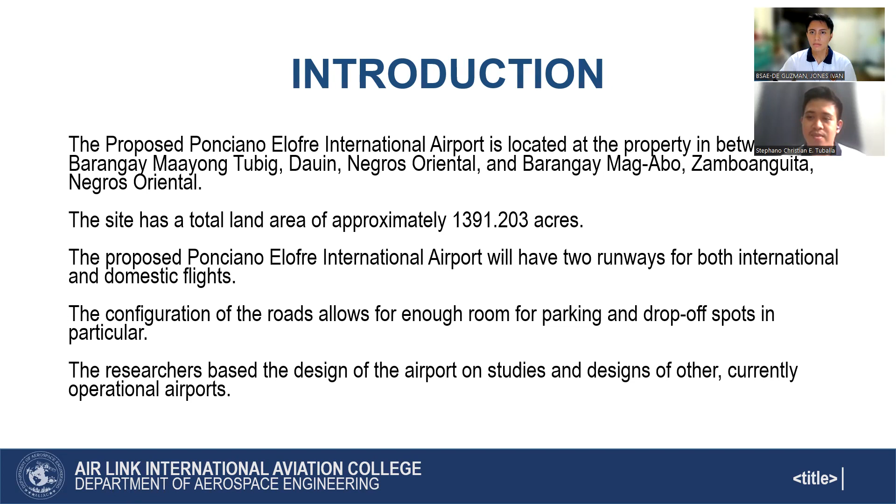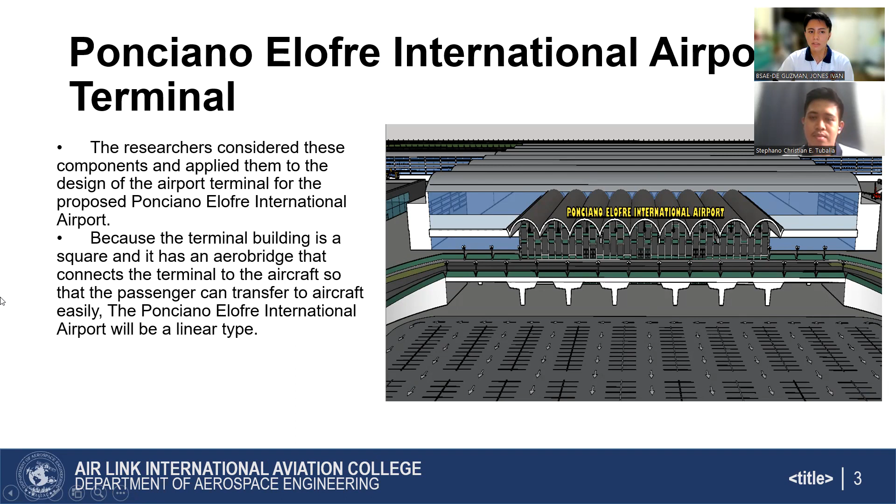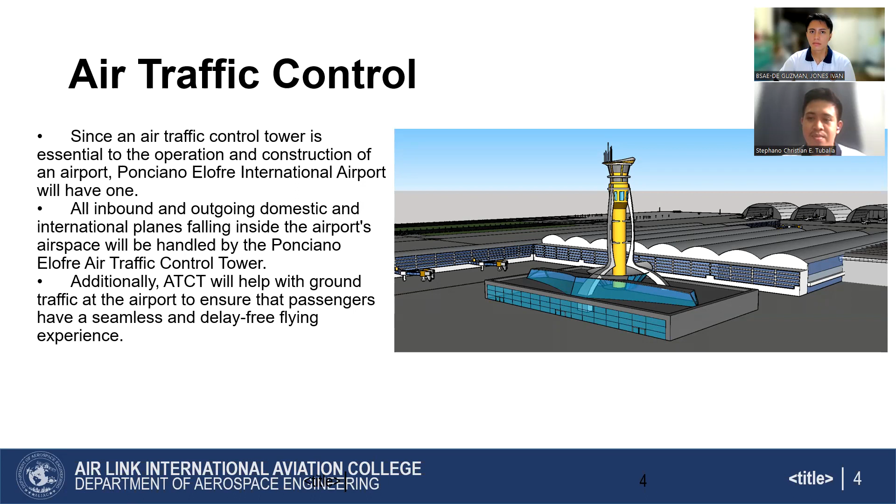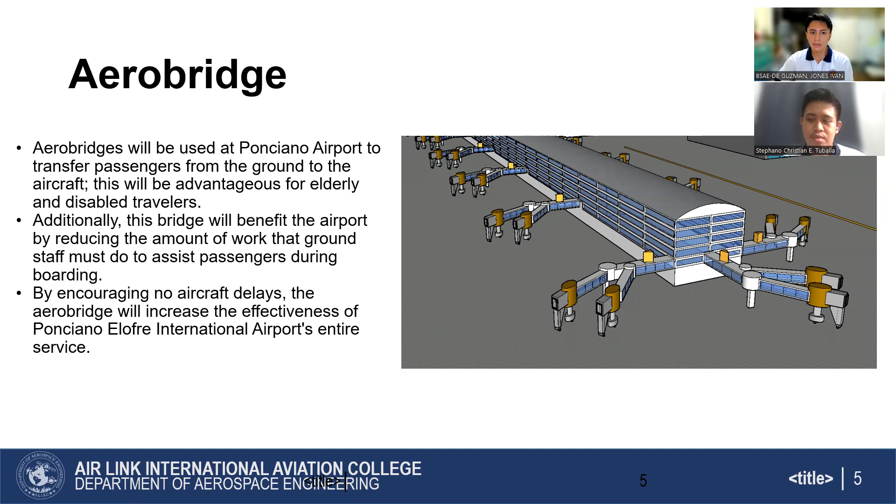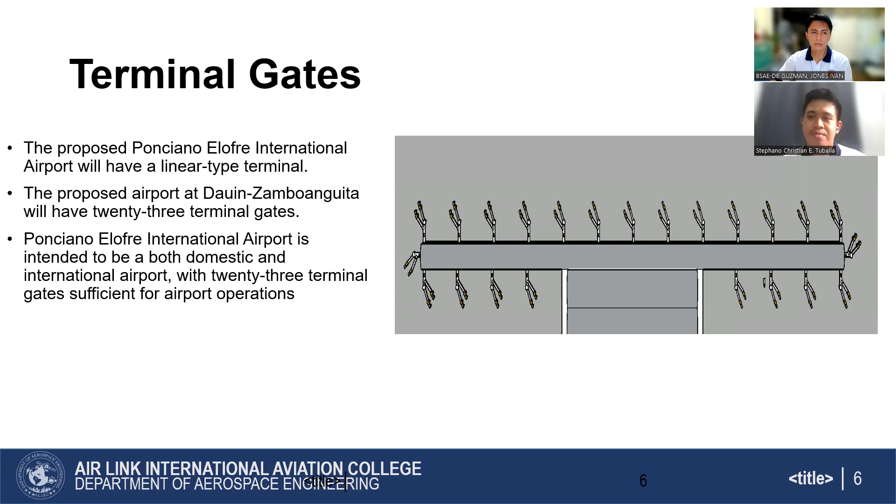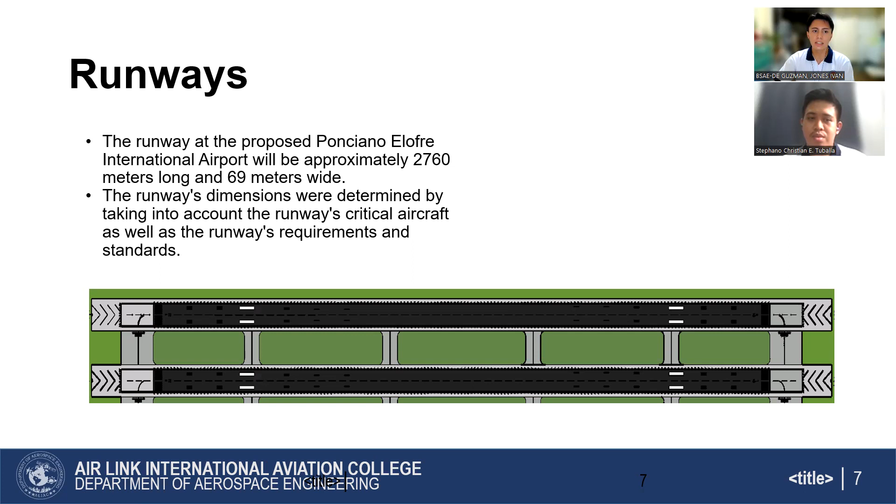Next, we have runways. The runway at the proposed airport will be approximately 2,760 meters long and 69 meters wide. The runway's dimensions were determined by taking into account the runway's critical aircraft as well as the runway's requirements and standards.

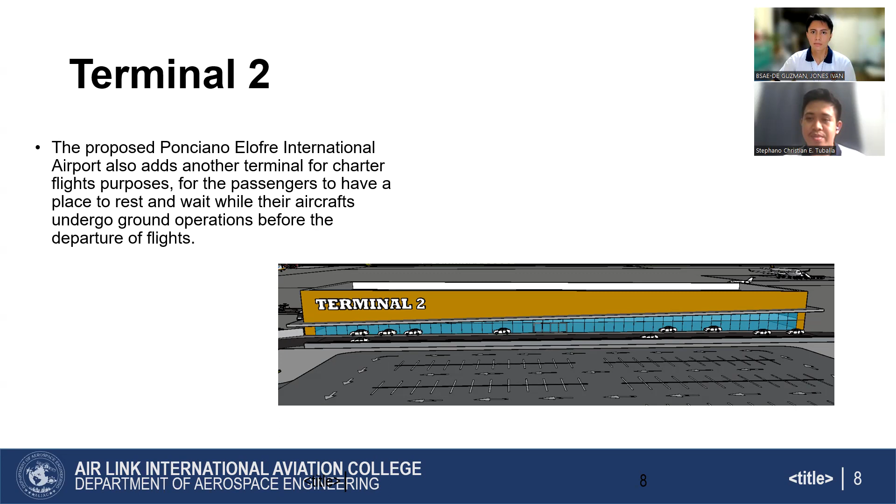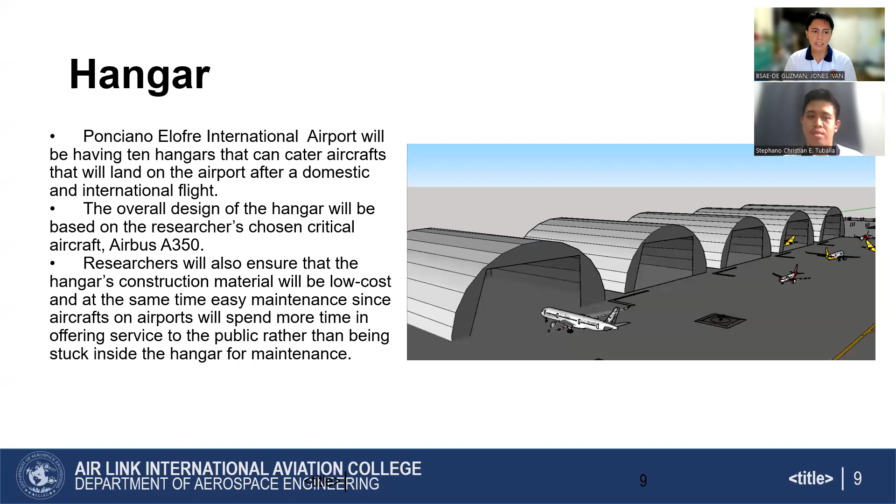Next, we have hangars. Ponciano Elofre International Airport will have 10 hangars that can cater to aircraft landing after domestic and international flights. The overall design of the hangar will be based on the researcher-chosen critical aircraft, the Airbus A350. Researchers will also ensure the hangar's construction material is low cost and at the same time easy to maintain, since aircraft will spend more time offering service to the public rather than being stuck inside the hangar for maintenance.

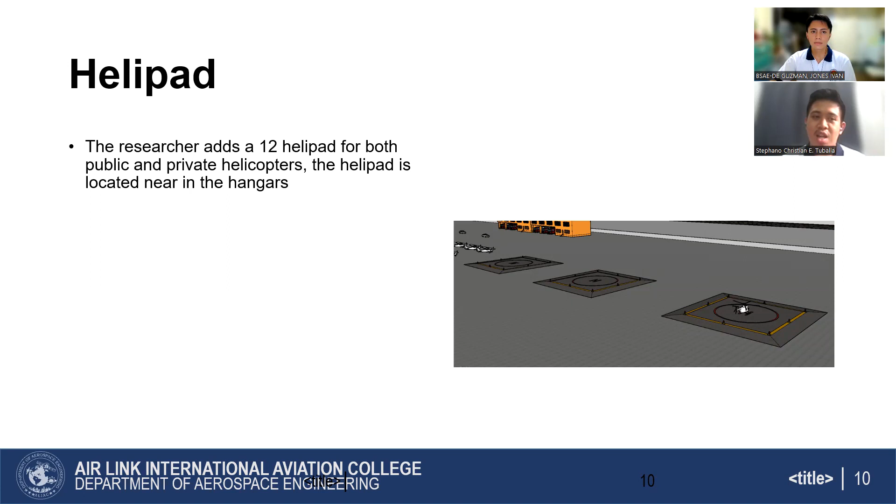Now we have the helipad. The researchers added 12 helipads for both public and private helicopters. The helipad is located near the hangars.

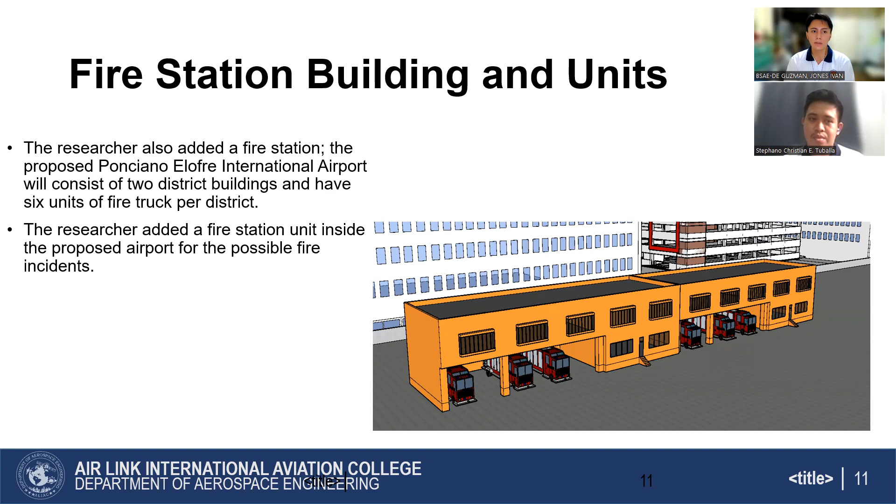Next, we have the fire station building and units. The researcher also added a fire station. The proposed airport will consist of two district buildings with 6 units of fire trucks per district, added for the possibility of a fire incident.

Next, we have approach lighting system. An approach lighting system will be constructed on the runway at the proposed Ponciano Elofre International Airport to facilitate a safe landing approach for pilots in inclement weather and at night. In addition to promoting safety for pilots and passengers, ALS also provides enough illumination for the airport to be visible at all times of day and provide clarity for bystanders visiting the site.

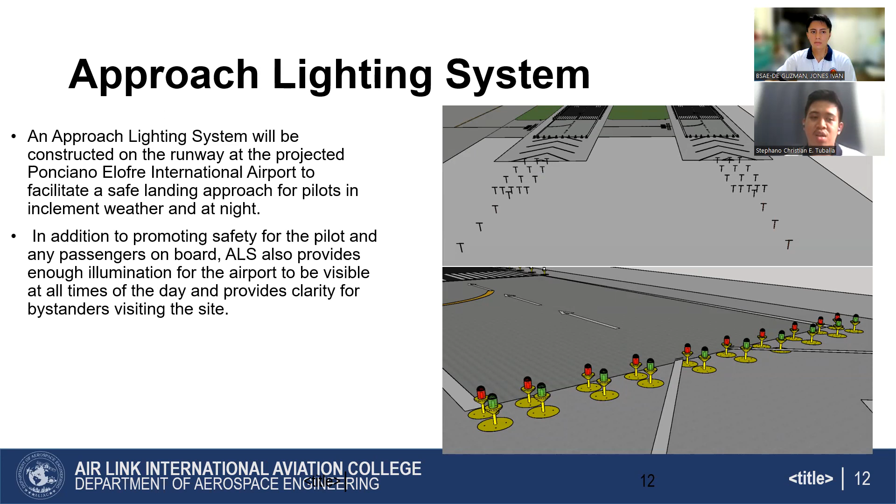Next, we have distance measuring equipment. Distance measuring equipment is defined as the navigation beacon usually coupled with a VOR beacon to enable aircraft to measure their position relative to that beacon. Aircraft send out a signal which is sent back after a fixed delay by the DME ground equipment. The proposed Ponciano Elofre International Airport will have two DME units along the runway of the proposed airport.

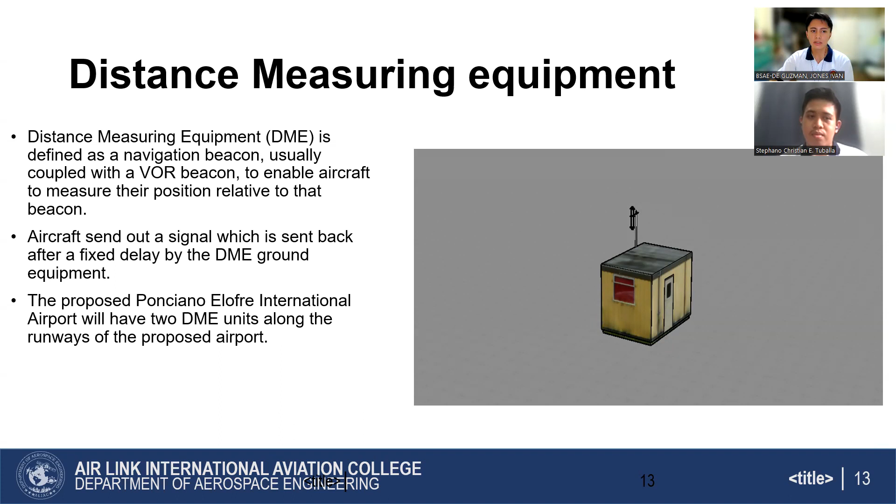Now we have the VOR DME. Two navigational aids are used in aircraft operations, VOR and DME. Very high frequency omnidirectional range radio beacon, or VOR, provides the airplane with information on the magnetic or radial bearing from the station. Together, these two navigational aids send signals to aircraft that help them locate themselves and the airport. Beacons operating on the same frequency as VOR and DME are located in the same vicinity.

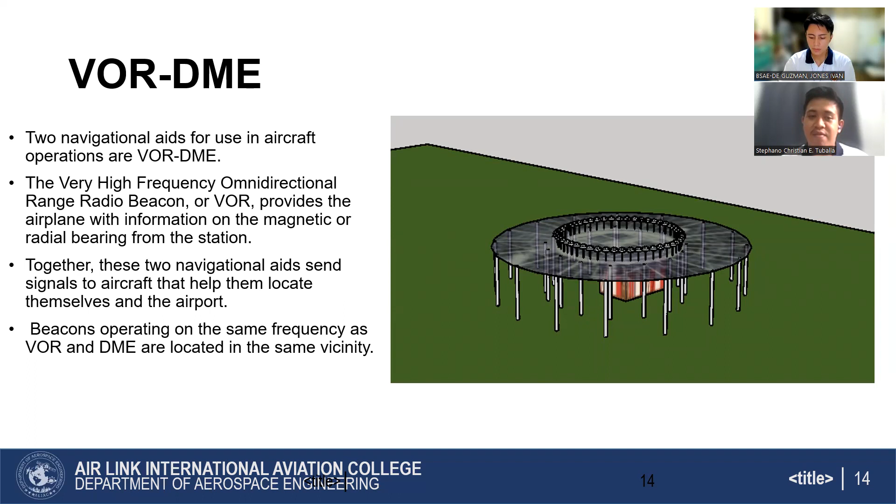Next, we have the non-directional beacon. Non-directional beacons become marginally unreliable in severe weather circumstances, such as lightning and intense precipitation. So the pilot must constantly check the NDB's identification. Non-directional beacons will be installed at Ponciano Elofre International Airport. The researchers suggested this to enable pilots in conducting more efficient flights. These beacons will also be the only way to assist planes lacking GPS systems in navigating the skies.

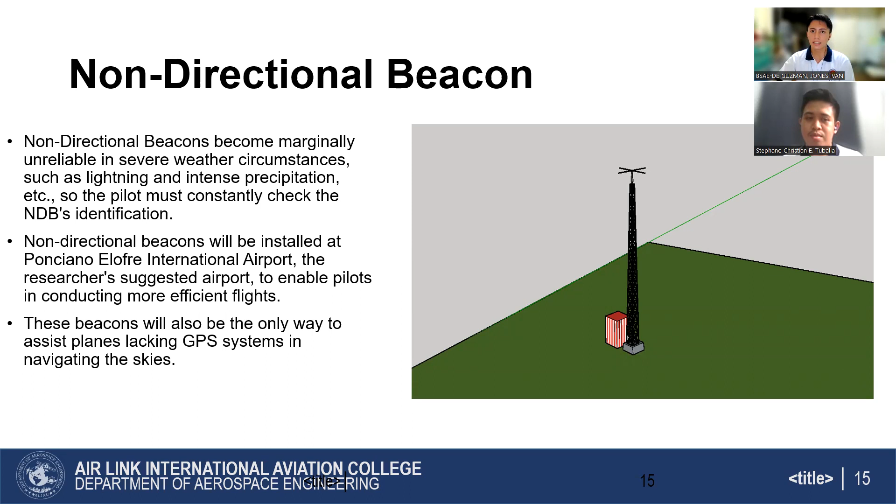An airport taxiway is the route used by planes to get from runway to aprons, hangars, terminals, and other buildings. There is typically no set speed limit for taxiing at airports. The proposed Ponciano Elofre International Airport has a taxiway that will lead aircraft to travel to apron from runways and also from apron to runways.

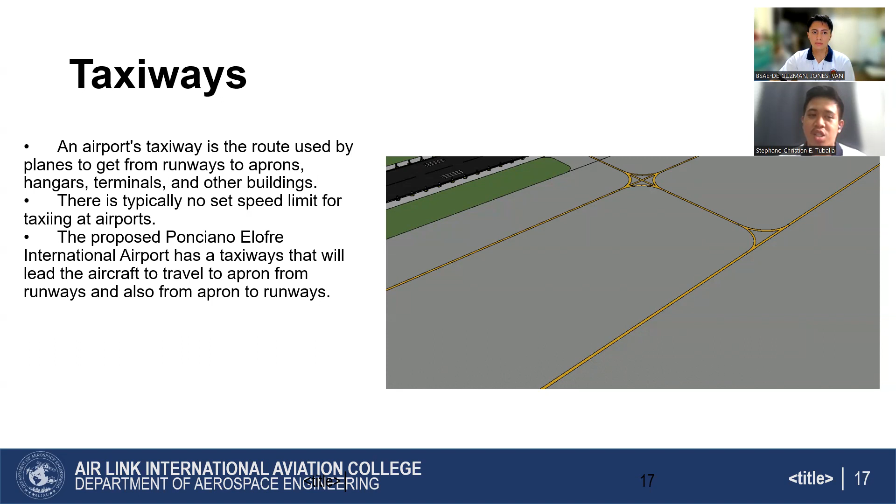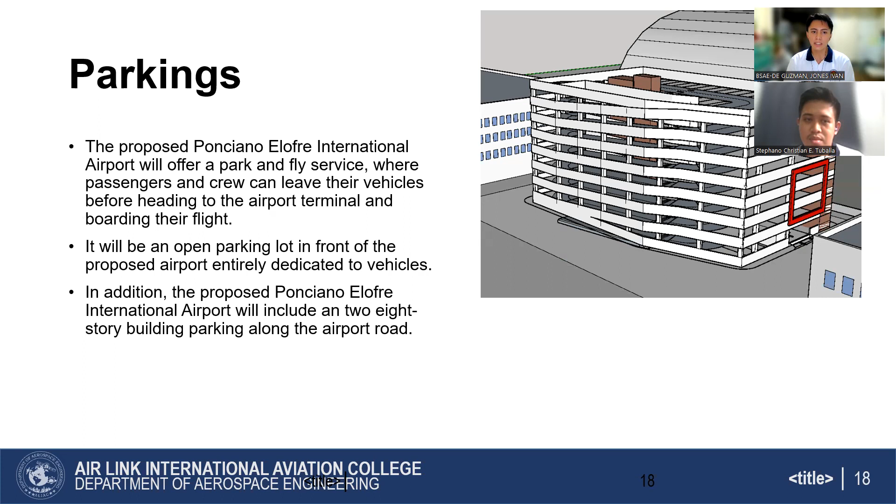In addition, the proposed Ponciano Elofre International Airport will include a two 8-story building parking along the airport road.

Next, we have land transport terminal. Buses, jeepneys, easy rides, and tricycles are the most prevalent modes of transportation around Negros Oriental. When passengers go to Ponciano International Airport, they can use their own privately owned vehicles. If they don't have one, they can utilize the available public transportation in the province going directly to the airport. For those close enough to the airport, particularly those from Dauin and Zamboanguita, they can use their respective TODAs, or Tricycle Operators and Drivers Association, to bring them to the airport.

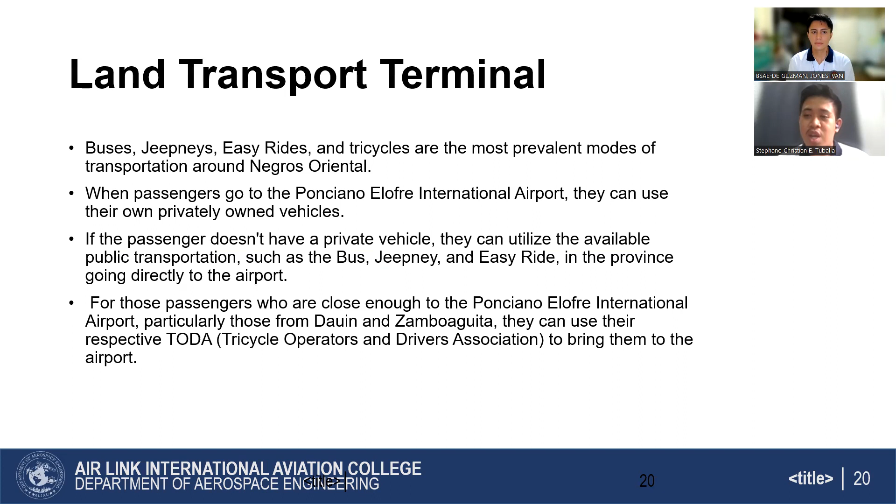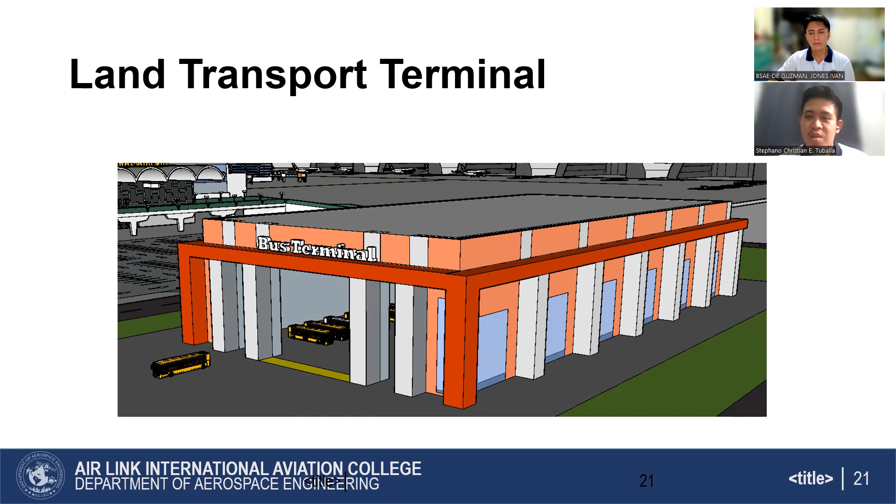Here we can see the terminal for the different modes of transportation.

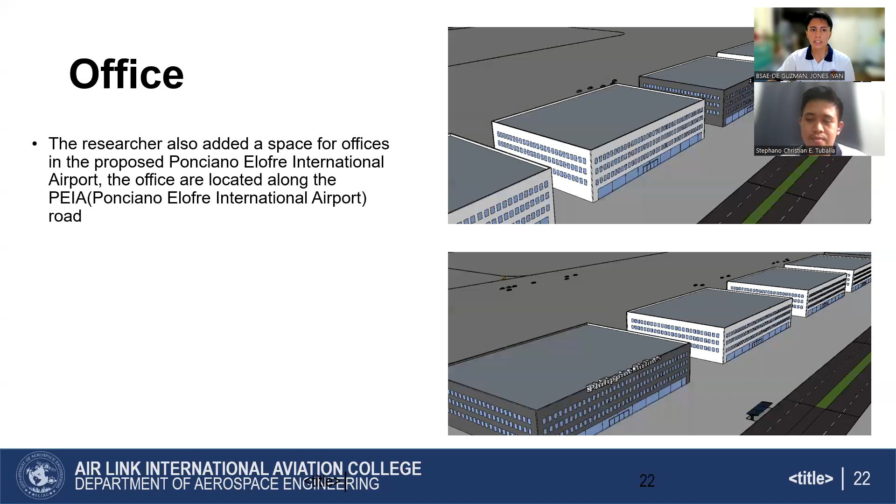Next, we have offices. The researchers also added a space for offices in the proposed Ponciano Elofre International Airport. The offices are located along the PEIA, known as Ponciano Elofre International Airport Road.